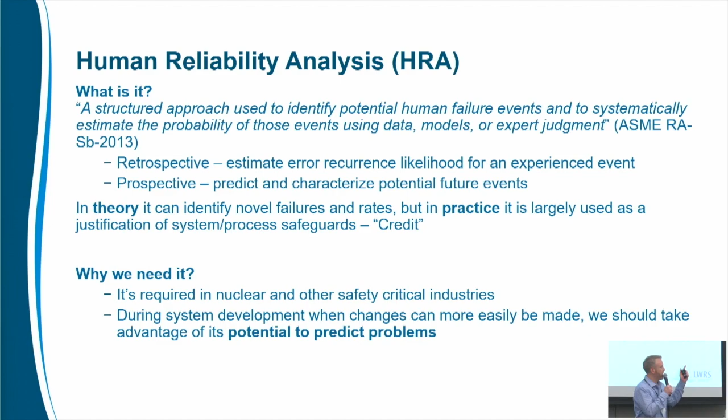Okay, and that's what this, oh, shoot, I really don't like that. Okay, that's what this next slide is going to get into. So there's kind of two recent trends.

So again, I come from the world of nuclear, and the world of nuclear is very, very old. And so a lot of the technologies, if you walk into a control room, it kind of looks like the movie Oppenheimer, if you remember that. We have analog dials and indicators all over the place. And it's very archaic. At the same time, it's very, very reliable, and it's kind of the mentality of if it's not broken, don't fix it. Let's keep on chugging along.

But we're getting to the point where that's not really possible, so we're being forced to consider these things and how to update them, as well as, like I mentioned, there's this wave of new reactor technologies that are going to be able to bring power in different formats, and so we're going to have to be able to understand these new ways. And so we're having to develop these new concepts of operations. And so that includes a lot of digital technologies and some different kind of concepts.

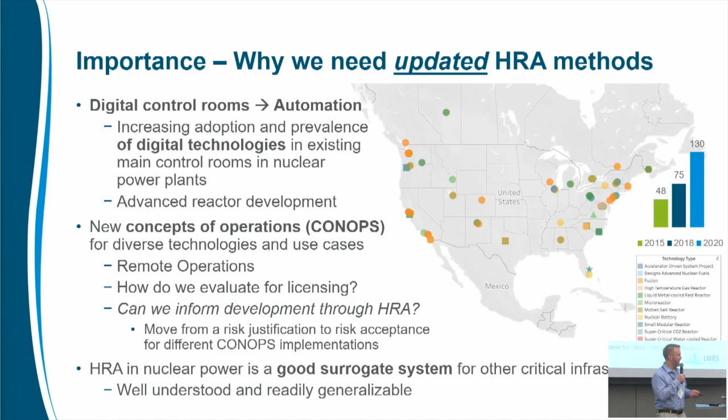So remote operations is a huge one, and we have a lot of projects. In fact, that's probably one of the main ones I'm working on right now, remote operations for some of these small reactors. Okay, and so I guess the applicability to most of the folks in this room, because I don't think any of you work in commercial power applications necessarily, is that some of the methods that we've developed here either overlap or they might be applicable directly to some of the projects you're working on.

Okay, so before we get too far into this, so I'm already behind. Okay, so the traditional human factor, I'm gonna get rid of this. It's not working out for me as well as I thought it would.

Once you've identified that, then you're able to essentially evaluate the context surrounding that, and they give you a glossary of terms, maybe is the way you want to put it. We call them performance shaping factors, and associated with these performance shaping factors are quantified values. So you can either have a higher likelihood of error because of them, or you can have a lower likelihood of error. Now, where those values come from, all of them stem from one of these original methods, and that's a very, very old method, but actually it's very, very accurate, apparently. But we certainly should have better estimates with some of the advanced modeling we have these days, and that's one of the places we're trying to go with this.

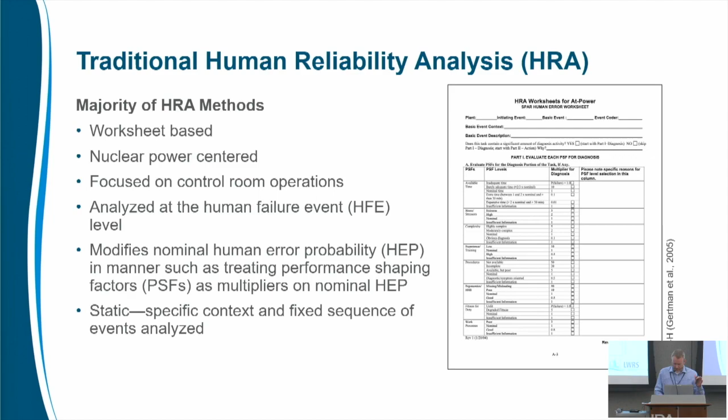Okay, so that's the traditional approach. So what's wrong with this? I think it's pretty obvious. It only works for what you know because you have to come up with the failure event. It doesn't generate it by itself. And on top of that, it's very, very labor intensive. And anytime you want to change your analysis, you have to redo it. So now there are some calculators out there.

So there's one called SAPHIRE, and then there's another one, CAFTA, I think is what it's called, which are technically PRA or larger encompassing probabilistic analysis methods. But they're software that let you kind of do these things and it'll run the analysis, but it's still static. And by static, what I mean is it's not changing the analysis. So it's not trying to take different events and sequences and things like that, right? It's actually just looking at the whole gamut of whatever you put into it.

Okay, and my boss actually put this one in. So he actually wrote the opposite of what I'm saying here, which is there's nothing wrong with these, and he's right. That's what I mentioned before. So we use these effectively today. Sure, they're good, and they've been used, but we can do better, I would argue. So we can create more realistic accounts of human performance if we use some of these advances in computational modeling that other fields have already taken advantage of. It's just we've largely ignored them because nobody wants to deal with that fuzzy nature.

So the number one problem you run into, in particular if you're the only person of this kind of domain in a room full of engineers, is that, well, people can do anything, right? So they're going to be your number one source of error in a lot of cases. And so how do you want to account for that? It's such an open-ended problem. But there are ways to systematically go about that. Or at least that's what we're trying for.

So, okay, with that, we're into the dynamic. Oh, maybe I'm hitting this.

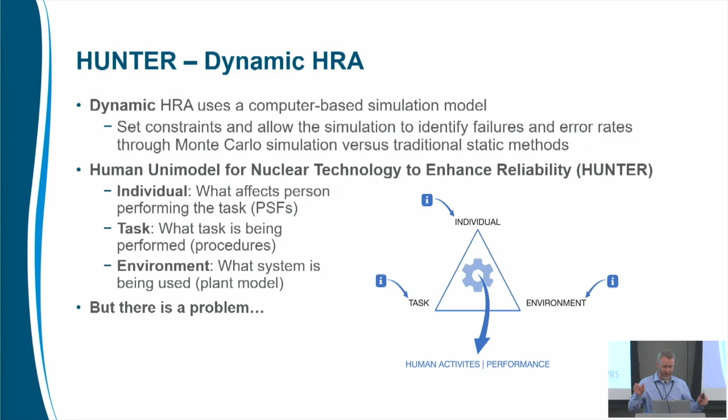Ooh, just don't touch the keyboard.

So nuclear power plant operators are one of the most trained professionals. I mean, like in aviation, you train a lot, I believe, but these people train multiple times a year. So it's an immense amount of training. So just to become a nuclear power plant operator, which granted, I'm talking to a room full of people who are highly trained experts in a lot of domains, but these folks go through training after training, and the recertification that they go through is pretty intense.

And so we're talking, it takes about 2 years, regardless of your background, to first know how to control one of these plants. And I'll show an image of it later, but a plant is about, oh gosh, I have no idea how many actual parameters. Our simulator for one of our plants has like 100,000 data points, right? So that's just to represent the plant. And granted, that's multiple points within a component, all these other things.

But just think of it in terms of alarms. There's about 800 different alarms that can go off at any one point in time, and they are related to each other. So it's actually more of a pattern recognition kind of thing when they do go off. But it's a very immense and complex thing. And so the challenge of that is that it takes a lot of work to actually put together one of these studies. Collecting the data on people interacting with this system is very challenging.

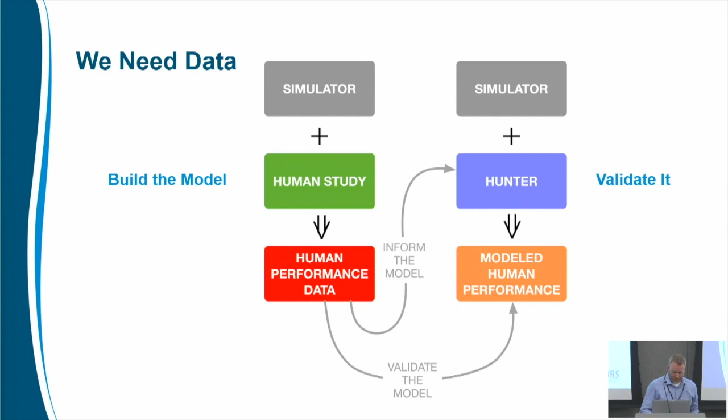So when you go through one of these kinds of scenarios, it can range from some of the shorter ones, 15 minutes if you're lucky, but they can go all the way up to like 4 hours, right? And often what happens when we're doing this is you end up with data points of one, because it's either they succeeded or they didn't. Now, we do go into more detail about how the tasks themselves were completed within that. But it's to no point where we could actually model it based off of that. We just don't have enough resolution there to do that. And so it's presented a lot of problems.

So over the last decade or so, we've actually advanced some ways to collect data in this environment. And we're not the only ones doing this either. But it's still very challenging to get the data that we need.

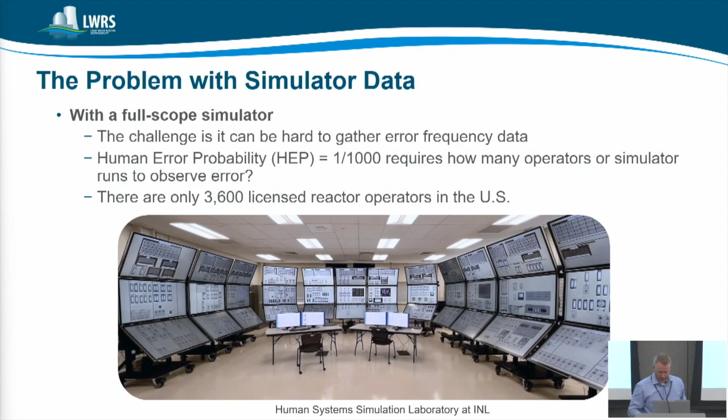Okay, so one of the solutions that we've identified as a potential way to go about this is we can gather HRA data using a different platform or a simplified nuclear simulator. So this is actually my dissertation back in the day.

All right, so we built the Rancor Microworld Simulator, and the idea is that because it is a simplified platform, but it actually emulates, we can go into the details of what it is exactly in a minute here, which we will, but it emulates a nuclear power plant process, and so we can actually collect people doing data on that. And the idea is that we can actually collect not just operators, but we can extend that to other folks. And by doing that, we can create the capability to collect a lot more data, and granted, it's a different level of expertise, but we'll get into all that.

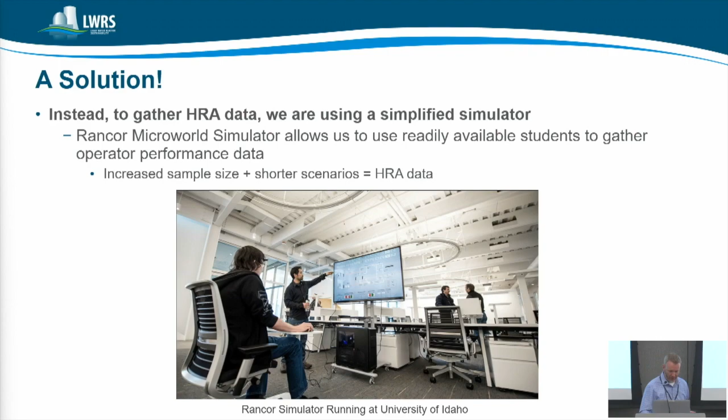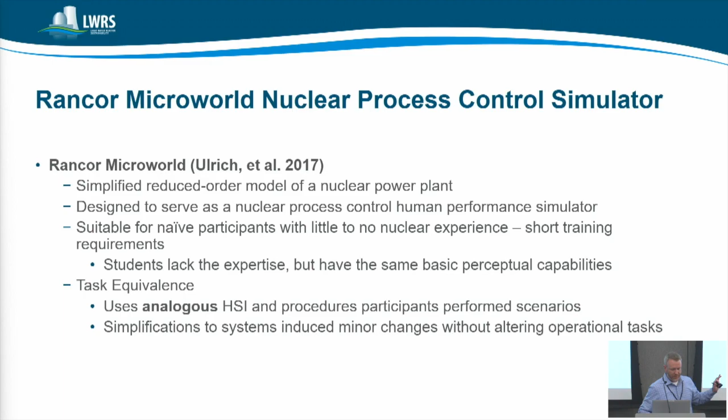Okay. So, simplified reduced order model of a nuclear power plant. It's kind of a small modular reactor design. And we've done a lot of testing with this. So just to give you a sense of what it actually looks like, some of these details I don't think matter too much. But you have all the pieces of a nuclear power plant in just a simple desktop.

And coincidentally, this is not something we envisioned when I was working on this back in like 2013 or 14. But this is now about the same complexity as a lot of the microreactors that are coming out. And so interestingly, even though it was built to be a simplified version, it actually ended up recreating what the future versions became, if that makes sense. And so inadvertently, it's maybe more applicable than ever.

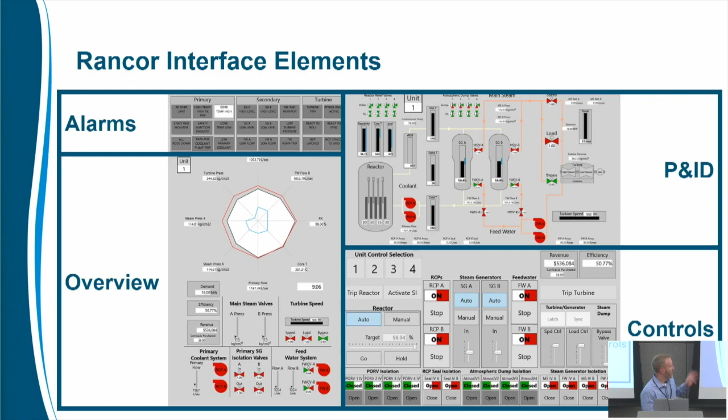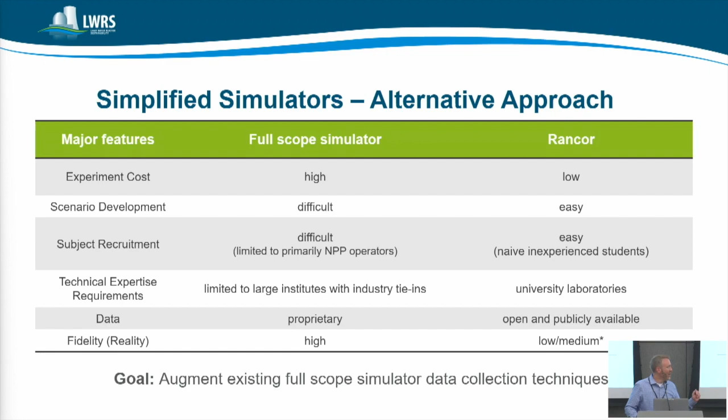But it does come at a cost because this is a very simplified package. And so your fidelity is reduced. The scenario development is much easier. It's much more accessible. You can recruit people far more easily because the platform is easier to actually have people that can understand the scenarios. It's easier to have people that can use this from a research perspective to actually build scenarios. The drawback is that you don't have experts actually using the system, which is a major drawback. But we've done a number of validation studies to kind of try to understand that difference.

And so we didn't want to waste time essentially having operators try this out on a full scope sim. So we were able to actually kind of strap it on to our simplified simulator, have a bunch of university students, refine the HMI, deal with all the problems that we had there, and then put it into the actual full scope simulator with operators and only address then the operational issues, as opposed to being kind of bogged down into, well, this doesn't make sense, I don't understand why it looks like this, kind of stuff.

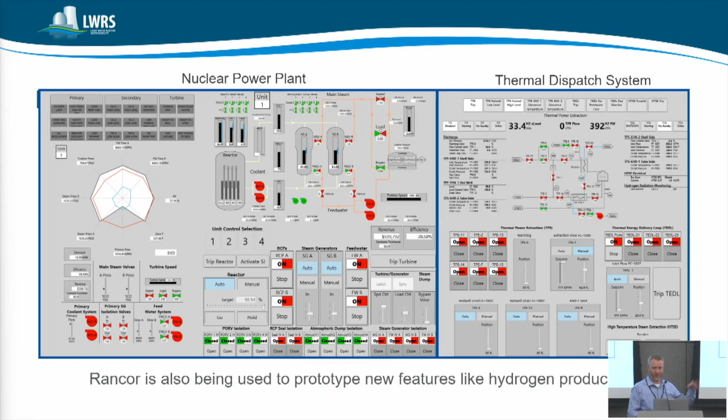So computer-based procedures are fairly novel in nuclear. They're not well implemented anywhere. And we actually did a study where we used different levels of those and compared performance. And that same data actually informs HRA quite nicely, is what we found. They did two scenarios, startup and loss of feed water. Startup is a routine operation. Loss of feed water is a casualty situation where you have to figure out why your feed water system came offline. So this is just an updated version of that same simulator I showed you.

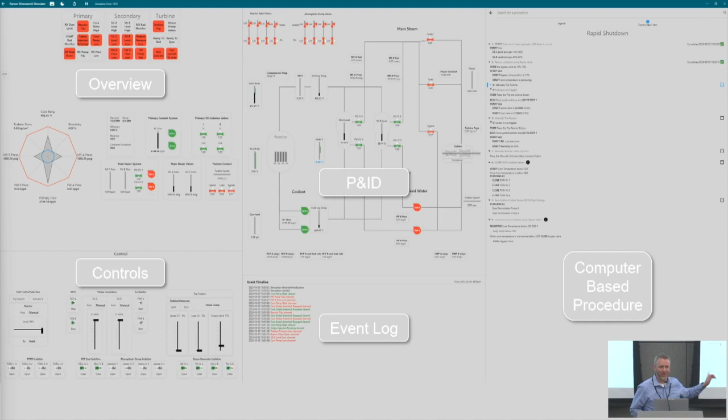And on the right, the key thing is that you have computer-based procedures that actually guide the people walking through this scenario. So the cool thing, or maybe the bad thing too, is that without actually knowing how to control this, you can walk up to this, follow these procedures, and execute them. You might not understand why you're doing it, but you can do it. That's kind of what this is adding.

Okay, so just briefly, what are the different types of computer-based procedures? You could think of it as a form of automation, and in fact, that's the way that a lot of these frame it. There's kind of two relevant standards. IEEE 1786 has a very long title, but it's essentially a guide for computer-based procedures. There's type 1, 2, and 3, and the key distinction, which you can see in those graphics, is that type 1 is really just a digital representation, so it doesn't give you live information. Type 2 does.

So you can see on that: verify bypass valve position at 10%, and the current value is highlighted in red and it says 0. So it gives you logically coded information to tell you the state of things. Type 3 actually embeds soft controls. So what we're moving away from is having to read a paper-based procedure and look at the indicators over here. You can actually do it all in one place, is what this is introducing. There's another way to view it, which is more automation based, and this number is actually wrong too.

It's actually 6634; I transposed that when I wrote that. Essentially it categorizes the different functions of a procedure: monitoring and detection, situation assessment, response planning, and response implementation. And there you can see I've walked through the different levels that we have here, and just for sake of time, I'm going to skip over that.

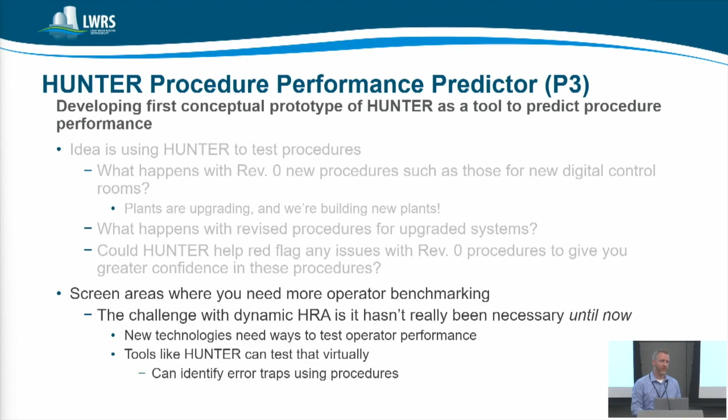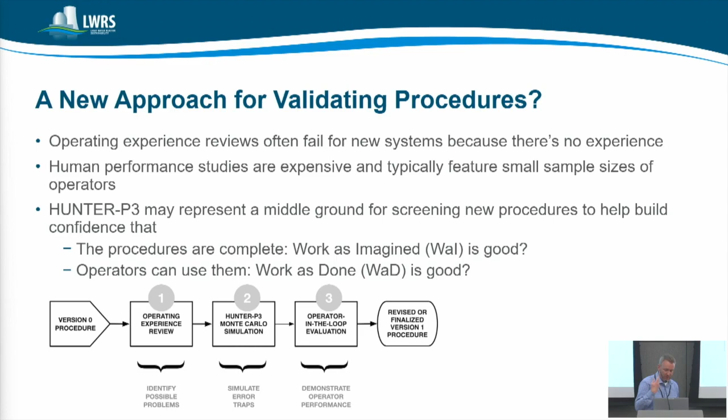But what happens when you get off track? How do you recover from those types of things? And that's where this system is really able to look at new or prospective types of situations and reveal to us problems and refinements. And that's what this second to last slide is talking about. It's essentially operating experience review. You come up with procedures, then you can do an evaluation, and we should have a nice set of digital procedures ready to go for our advanced fleet of reactors. That's the end of the story there.

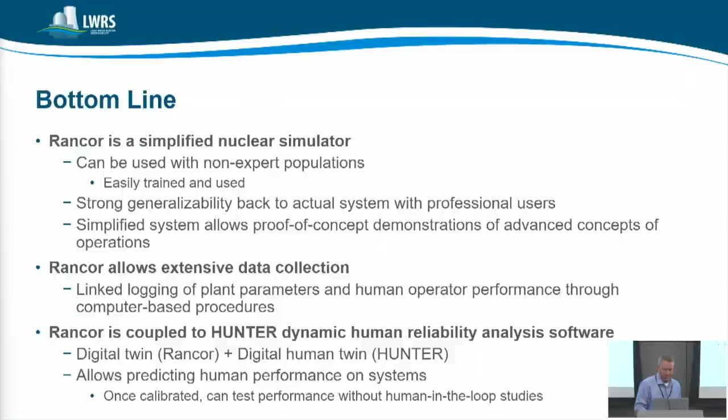Thank you for that talk. It was really great. So I'm interested in how you measure human error. The way you were describing the digital system in one of these plants, you made it sound like you could collect data, and because you know the procedures so well, you know what they should be doing, and if they don't do that, that's error. If the process is so well defined that you can define error that way, why isn't it automated? I guess is the second question.

Well, actually, that's one of my latest proposals. I turned it in last night. It is actually looking at generative procedures. But the problem is, they can be automated, and that's why there is a push for existing plants. I would say there's a lot of reasons why they're not, but that is certainly something that we could do and we probably should do.

But I'm talking more for the new. One is we don't know if our procedures cover everything until we encounter a situation where they don't, so that raises some issues, but that doesn't mean we shouldn't do it still, right? But we need to have that prospective capability to foresee all those possibilities, and how we handle that for a new reactor is maybe more where I'm focused, because you're absolutely right, they could be automated.